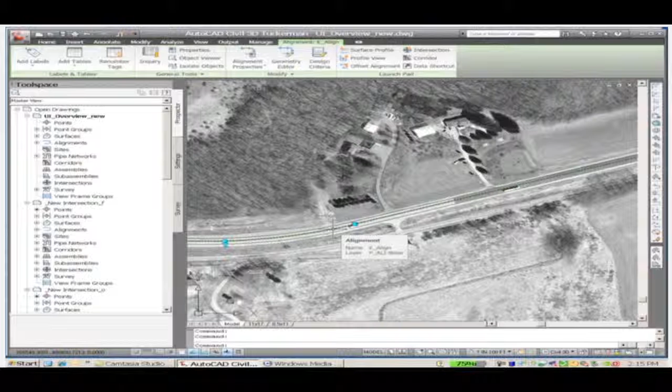In this drawing, you're going to see a roadway centerline or an alignment in plan view. So not only does the ribbon organize commands into related groups, but it updates based on context. For example, I can select the alignment from my drawing, and the ribbon automatically updates with a set of commands specific to alignments. This context-sensitive menu layout helps reduce the time spent searching for commands in pull-down menus and helps users become productive more quickly.

Customers that work with multiple Autodesk software products will benefit from a consistent look and feel across many of the products in the portfolio, so moving between applications won't be like learning a new language. The time savings gained from these interface changes may seem trivial at first, but if you multiply them across every operation performed by a user over the course of a day or week, the potential for productivity gains becomes clear.

Now let's explore some of the innovations in AutoCAD Civil 3D 2010 for transportation engineering projects.

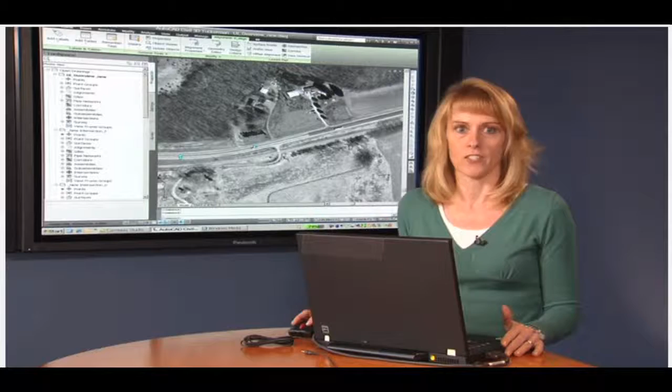Typically, when people think about transportation projects, they envision large new construction type projects—the type involving additional miles of state highways, interstates, tollways. While these projects do make the headlines, they're not representative of what transportation engineers typically see in practice.

The most common type of project is a roadway rehabilitation, which according to the U.S. DOT accounts for over 50% of the money spent on transportation infrastructure projects.

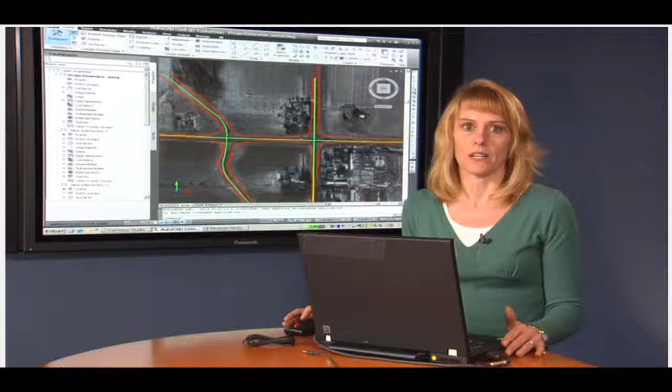What I'm going to show you today is a rehabilitation project that involves the reconfiguration of the two intersections shown here. This example has two parts. First, the distance between the two intersections does not meet minimum standards, so one of them will be replaced with an overpass bridge to allow traffic to flow under the highway. The second part of the project involves upgrading and reconfiguring the other intersection to meet current standards.

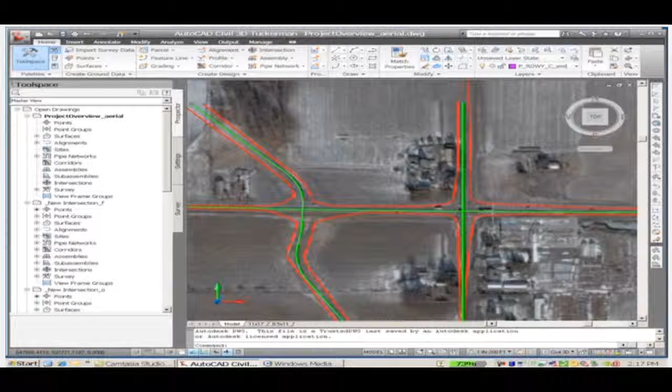We'll start by looking at the intersection upgrade. To design the at-grade intersection, we will use the powerful new intersection design features in Civil 3D 2010. These new tools help streamline how engineers work and make intersection modeling more flexible and configurable.

They will help engineers quickly iterate through different intersection options and help streamline a complicated workflow that sometimes took days to accomplish into only minutes.

One U.S. State Department of Transportation we are currently working with shared with me their workflow for designing a typical intersection. The workflow is 38 pages long and includes 33 steps. I mean, 33 steps, that's a lot of steps.

Much of the time in their workflow is spent manually laying out the geometry of the intersection and trying to accurately model each individual region in 3D.

Using the new intersection design features in Civil 3D 2010, that workflow can be reduced to only 4 steps. Geometry layout is wizard-driven and automates the generation of the intersection model. Needless to say, that DOT is anxious to get their hands on this new feature.

So let's have a look. Intersection design in Civil 3D is initiated by simply selecting the intersection point of the two roadways and specifying which is the main road.

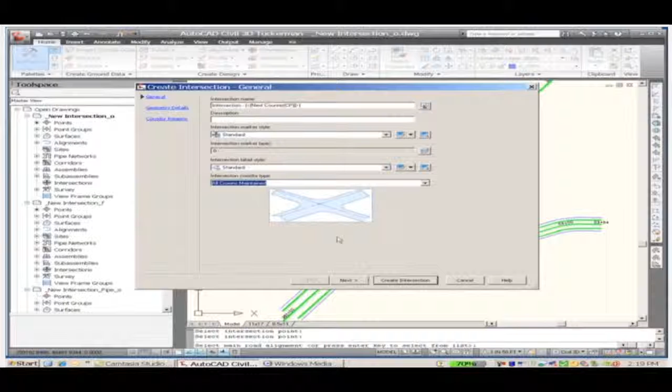Step 2 is where all the geometry of the intersection is defined, including the curves that connect the roadways in all 4 quadrants. The process is made easier by visual cues in the drawing that guide your way as you make inputs.

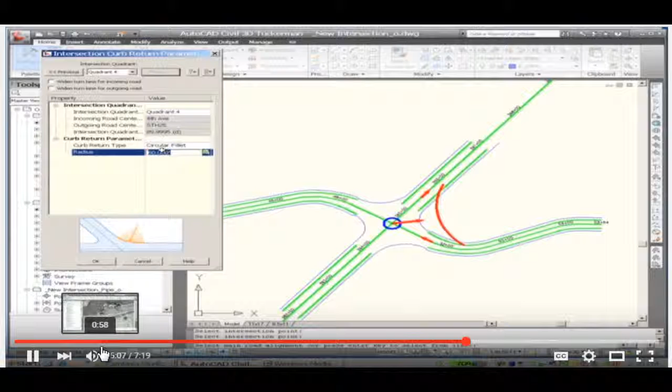The third step involves selecting assemblies, or simply put, the building blocks which will be used to define the 3D model of the intersection. Step 4, press the Create Intersection button. It is that simple.

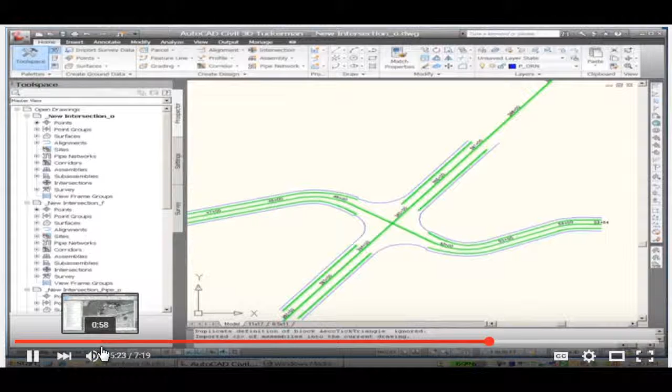I know when I worked for the Wisconsin DOT, everyone wanted a Design the Road button. This new feature in Civil 3D 2010 is the closest I've seen any software come to that.

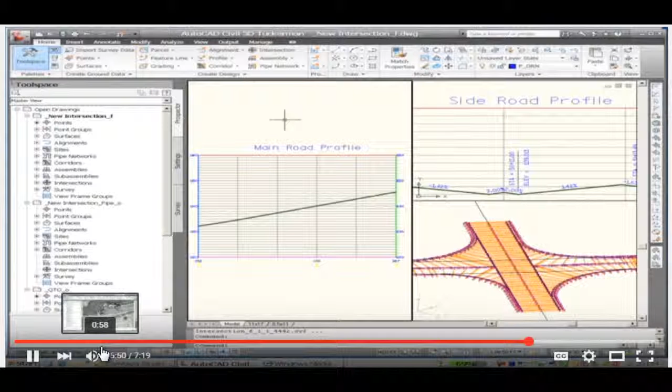The big benefit here is that the information in the intersection model is interrelated. For example, the side road profile and the main line profile are dynamically linked together. So if I make a change in the main line profile, that change is immediately reflected in the side road profile and corridor, and they update automatically as shown here. Without this capability, you would have to make all these adjustments manually, which is incredibly time-consuming and error-prone.

Beyond accelerating the design process, this new feature will help provide our customers with the ability to more quickly iterate through different intersection alternatives and layout conditions. This allows the engineer to more easily optimize the design for factors such as drainage and rideability.

In the past, the process of creating the intersection model would have taken hours, maybe even days to complete. Orangewood, a Dutch company participating in our Civil 3D 2010 Gold Beta program, told me that until now they rarely created detailed 3D intersection models because it was just too time-consuming. The CAD manager called the intersection design tool an astonishing piece of programming and said that instead of hours, he modeled his intersections in minutes.

Think about what this means in terms of cost savings. As I mentioned, intersection design is an iterative process, so with the help of Civil 3D 2010, the hours saved are multiplied by the number of iterations it takes to reach a final design. It's pretty powerful stuff.

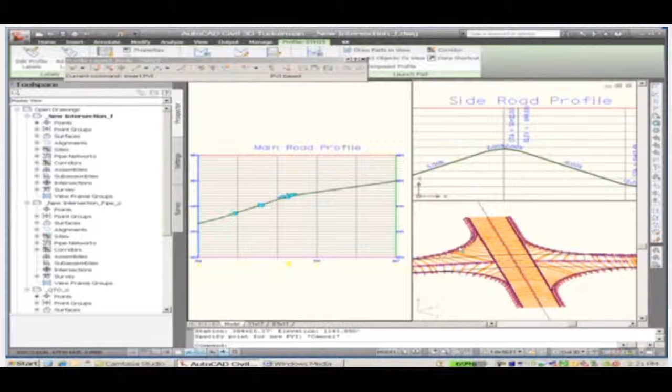Let's take a look at Revit Structure 2010 and the new Bridge Modeling Extension, which is a subscription benefit for Revit Structure subscription customers. The bridge engineers we talk to are looking for ways to collaborate in a more efficient and effective way with their civil engineering counterparts.

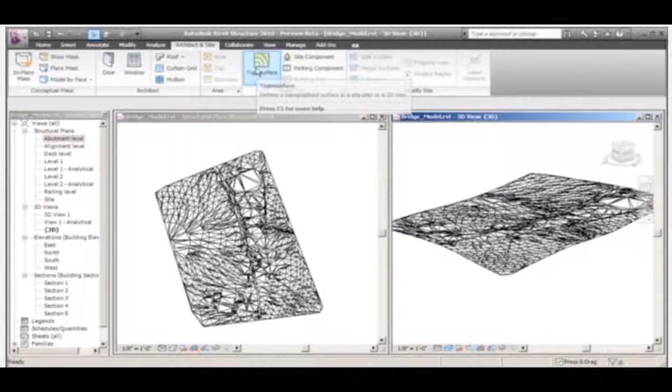One of the key features in the new Bridge Modeling Extension allows the bridge engineer to use road centerline and site condition information created by the civil engineer in Civil 3D. Surfaces designed by the civil engineer in Civil 3D are imported directly into Revit Structure, and this data can be used to quickly generate an accurate topographic surface for bridge modeling. This workflow drastically improves upon the 2D workflow that currently exists between civil engineers and bridge engineers.

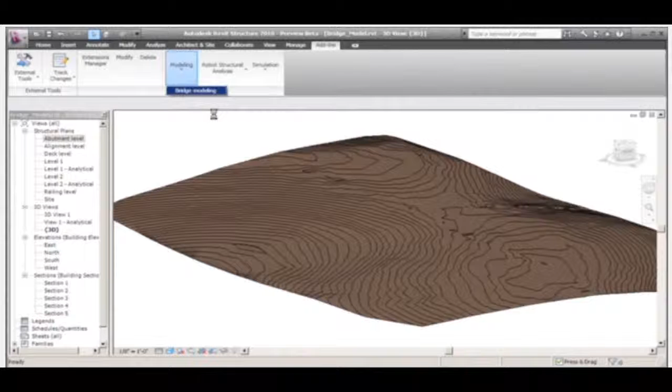In addition to the site information, the centerline of the road from Civil 3D can also be imported directly into the Bridge Modeling Extension using the industry standard format LandXML. The centerline compiles automatically once the file is imported, providing assurance that the bridge geometry we are creating matches what the civil engineer specified in Civil 3D.

The bridge engineer can now focus on defining critical layout information such as specifying the number of spans based on the overall length of the bridge, defining the deck properties, and defining the abutment type and location and the pier type and location. Since the road data was previously imported defining the locations of the abutments and piers along the road, this is a simple task.

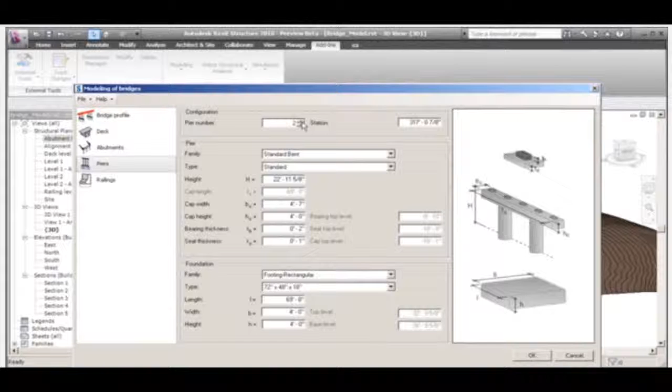With all the information from the civil engineer and the parameters defined by the bridge engineer, the bridge can be modeled instantly and we see the various views automatically updated. Now that we have our bridge modeled and the site created, we can adjust the parameters of the various bridge components to match the site conditions. A key aspect to note is that no two bridges are the same.

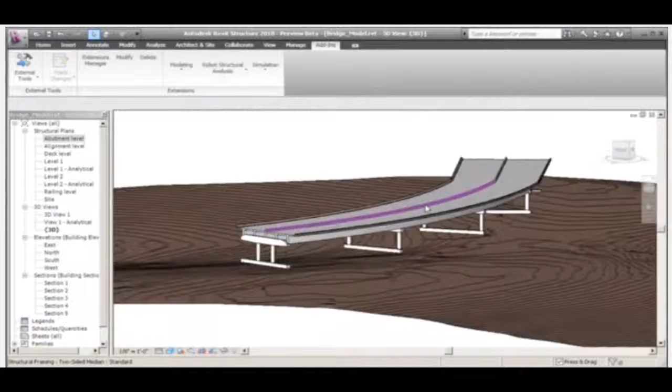Since all of the information for the bridge project is stored in one file, any changes made to the model are automatically propagated throughout the model, and all views such as plans, sections, details, and schedules. Using Revit Structure and collaborating with civil engineers using Civil 3D, bridge engineers are equipped with a BIM solution that helps improve coordination, visualization, and overall understanding of their bridge projects.

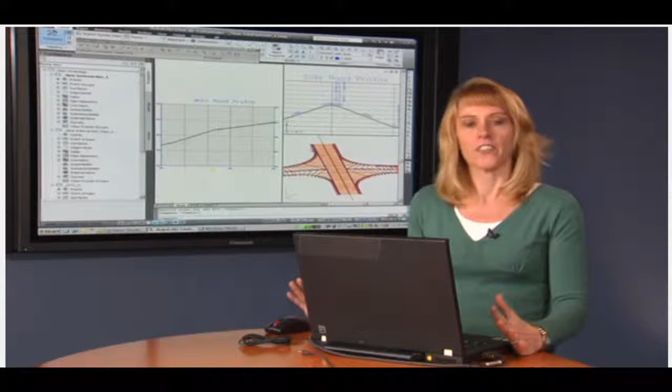Okay, so now that the intersection and overpass have been modeled, let's look at them in the context of the overall project area. As Adam mentioned earlier, one benefit of implementing a BIM process is the ability to leverage the model for visualization. This is particularly important in the conceptual design phase of the project.

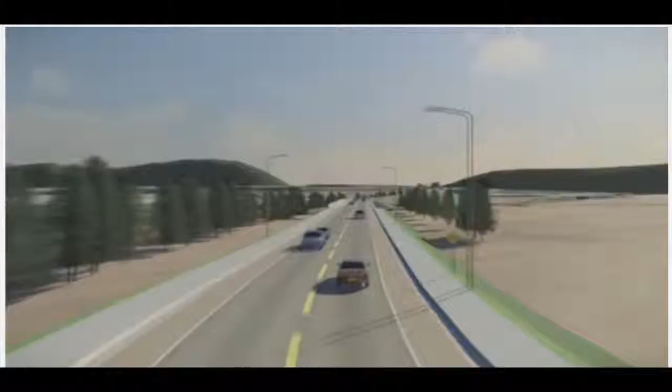Using Autodesk 3ds Max Design 2010 software and Dynamite VSP, a product from our partner 3AM Solutions, we can develop a project visualization showing the new overpass and how the highway traffic flows freely beyond it.

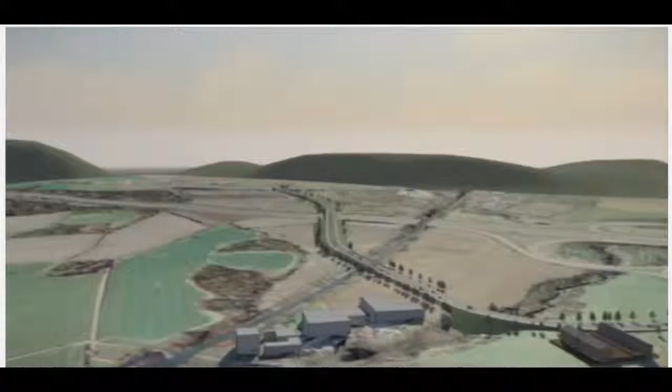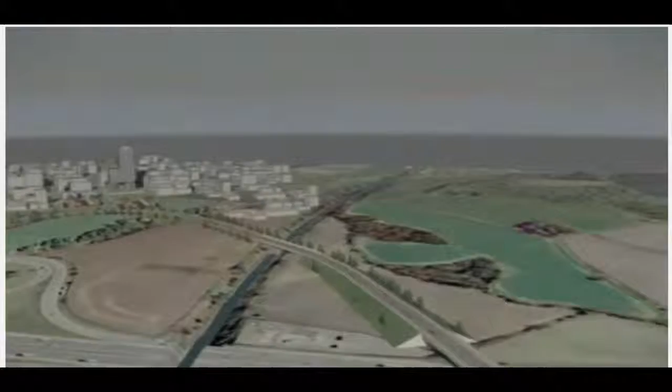Being able to accurately convey design intent will help reduce obstacles and objections and streamline project approval. Also, being able to visualize the project before it's built helps government agencies and community stakeholders better understand how the project will perform. Next up is the drainage network for our reconfigured intersection.

Stormwater drainage analysis is a key component of the overall roadway design process and is particularly important for maintaining road safety and minimizing erosion and water quality problems. Stormwater analysis has traditionally been disconnected from the overall road design process, making it difficult for the engineer to understand the impact of design changes on drainage without rerunning the analysis each time. This is time-consuming and error-prone.

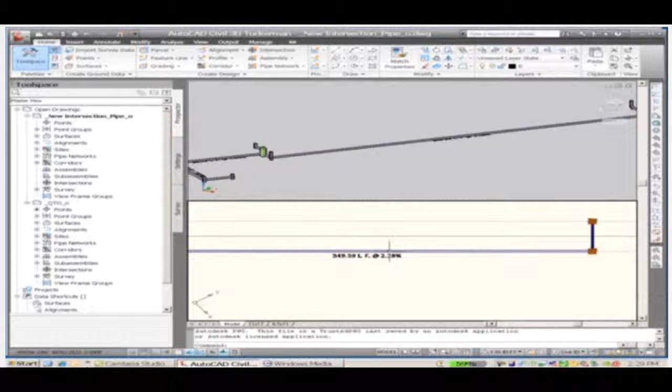High on the wish list of our transportation engineering customers is the ability to integrate stormwater analysis with roadway design. With Civil 3D 2010, the wait is over. Drainage networks can now be laid out in Civil 3D and then analyzed with an included extension that fully leverages the model. This tight integration between stormwater system layout and analysis makes it much easier for the engineer to account for stormwater drainage during design.

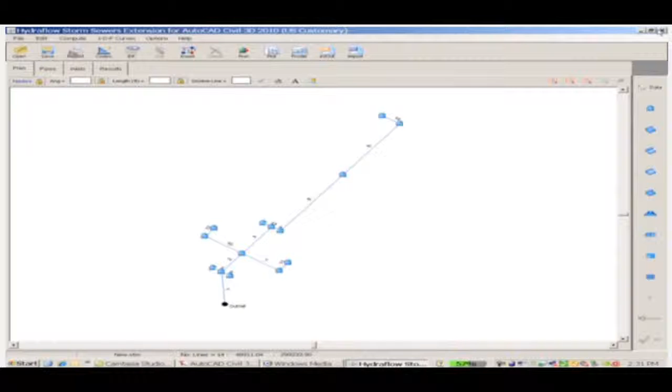So what I can do is once initial pipe layout is complete, the information on the proposed pipe can be sent out to be analyzed. When the analysis indicates a problem, changes are made to the updated network. And these can then be sent back to Civil 3D, or I can import them into my layout.

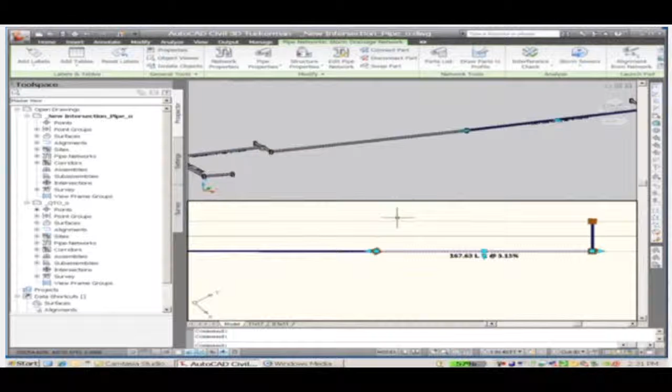So this more integrated approach to drainage network design and analysis will help our customers improve efficiency and quality, and checks one more thing off the 'I wish my software could do this' list.

Another critical part of the transportation engineering workflow, and one of the most tedious and time-consuming tasks during the production of a plan set, is the calculation of pay item quantities, also known as quantity takeoff. This is typically done manually, counting items paid for individually like lampposts, and performing measurements to get quantities of other items such as curb and gutter, which is paid for by the linear foot. When I worked for the Wisconsin DOT, we had teams of people focused on the task of computing quantities to prepare for bid letting. But with this time-consuming manual process comes a greater risk of errors and omissions.

The new quantity takeoff functionality in Civil 3D 2010 significantly streamlines this process by extracting quantities directly from the model. Our users will be able to assign pay items to objects in the model and have the software automatically count those objects, eliminating the need for manual counting and greatly reducing the chance of error.

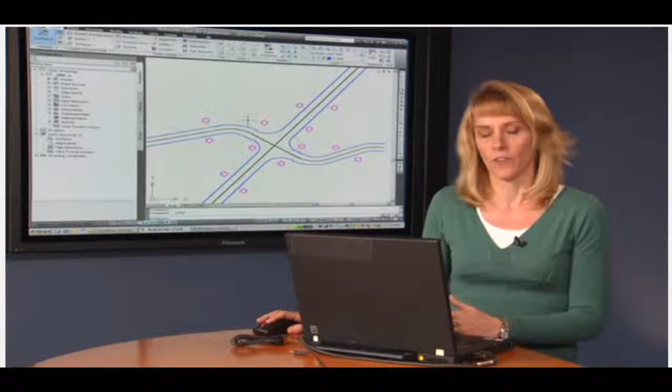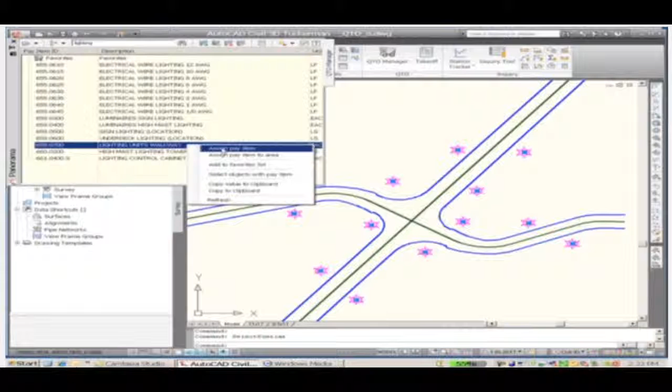So using the new quantity takeoff manager, pay item codes can be assigned to objects in the model. They can be assigned to objects individually. So to start, I'm going to assign a pay item to these lighting units that you see here, and I'm going to use the pay item lighting units walkway. Once I select the objects from my model, assigning pay items to them is a one-click process.

No more counting and entering values in a spreadsheet. Now, as a bonus, the Quantity Takeoff Manager in Civil 3D 2010 can also be used to check that pay items have been properly assigned. So I can just come in and check it out. It shows them to me, and I know that I got all of the pay items that I wanted.

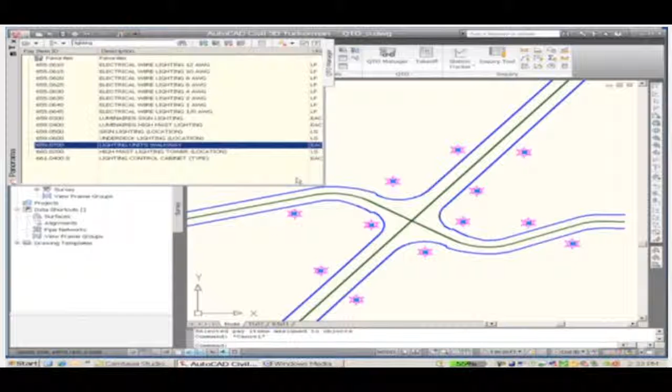This powerful new feature may seem trivial at first glance, but missed items in a cost estimate can result in expensive contract change orders in the field. When that cost comes out of your bonus at the end of the year, this no longer seems trivial.

Quantity Takeoff is also integrated with roadway corridor models. So inside a corridor model, I can assign pay items to things like flow line of your curb and gutter. So any feature line, I'm going to use something like curb and gutter, so I'll just look for it here. I'm going to use this type of curb and gutter, and all I have to do is say apply, and it goes through and assigns that pay item to that linear foot of curb and gutter.

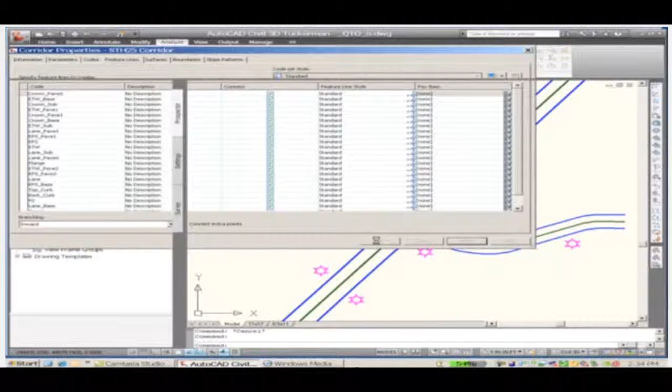The thing that our beta customers were most impressed by with this new feature is the fact that when changes are made to the corridor, the computed quantities update automatically. So the manual recalculation of quantities is virtually eliminated, and last-minute design changes don't result in hours of overtime to update quantities.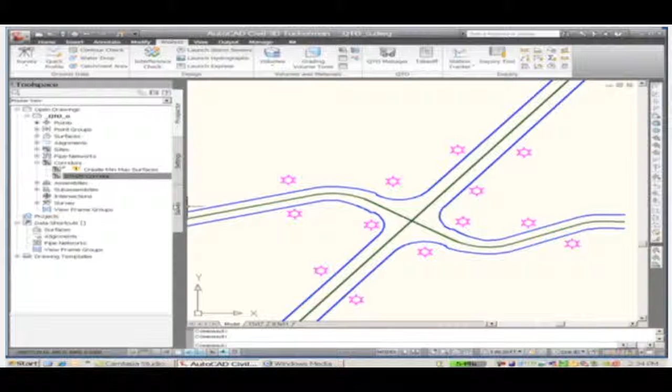Now, after pay items are assigned to objects in the model, quantity takeoffs can be computed, and different types of reports can be created, including style sheets that interface with the AASHTO transport software.

The new quantity takeoff functionality in Civil 3D 2010 helps to better integrate design and construction, enabling transportation engineering teams to better prepare for bid letting in an automated fashion. The result is a more streamlined transfer of information to cost estimating software mandated by many state agencies, and a decreased incidence of errors and omission.

Now, I'll take you back to Adam.

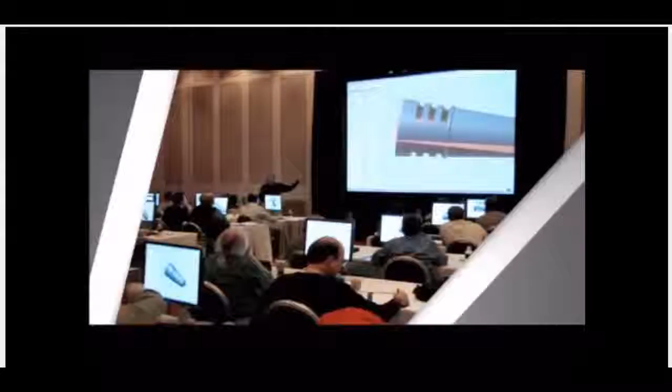We're going to talk about a really interesting field trip that Trimble and Autodesk sponsored on Monday of the event. I have with us Karen Weiss, and she's going to tell us all about it. Karen, what was this field trip about?

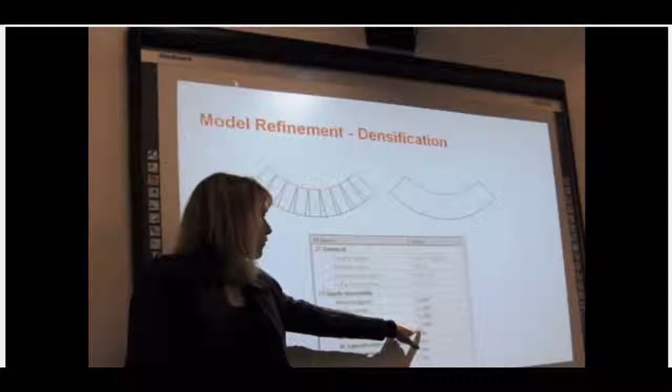Well, because we're focusing a lot on heavy construction and the model creation in Civil 3D and the whole 3D modeling aspect of everything, we've done some work with Trimble to create this importer for Trimble Business Center, a heavy construction edition. So the idea was really to show what happens with your model when you take it to construction and how far the technology has come.

Back when I started doing roadway design, we would create cross sections every 100 feet, and then that would get staked in the field. Well, now you cannot take that out to the field and put it into these machines. So the whole idea was to really show what's the best way to make that model in Civil 3D so that they can just take it directly into Trimble Business Center for use on the machinery.

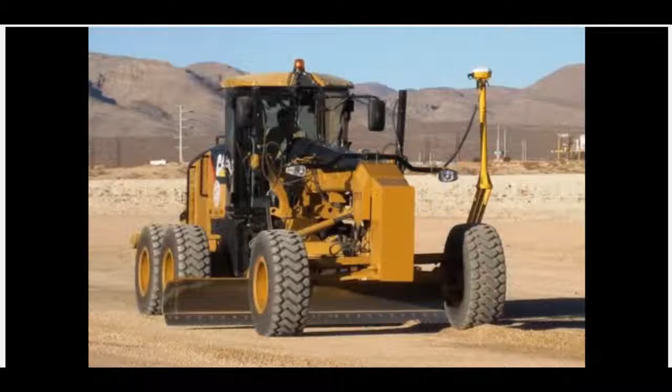So we looked at 3 different types of equipment. One was a motor grader. We also looked at just the total station using GPS and the rovers as well, so that everyone on the field trip got an idea of what the technology is, how the model from Civil 3D is used, and how important it is to actually create a model that is intelligent.

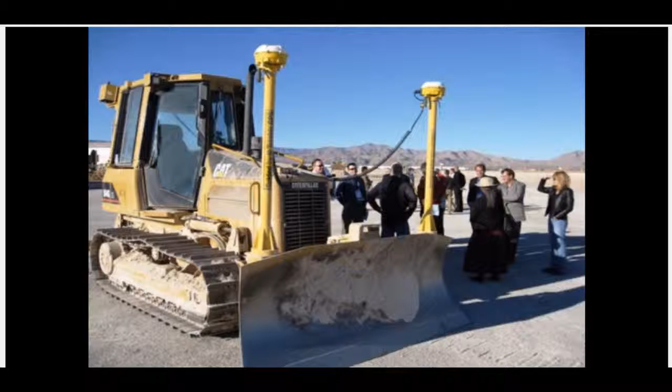So you literally went out with a group of folks to a facility where you were on the computers first, sort of set the stage, and then literally went out into the field where the GPS-guided equipment did its thing. So tell us a little bit more about that process.

So what initially happened was they went out to collect the existing ground data, which they gave to me. Then I used that to create a model in Civil 3D. So we did this ahead of time, so then I could give them the model. In the classroom, we actually talked about the model creation. I showed them exactly how I created the model, very quick and easy.

Passed that information to them, just gave them a stick. They loaded it into Trimble Business Center. Oh, I see, so they actually did it. Right, so then the Trimble folks did that. They created the file formats that they needed. And then, yes, we took it out into the field, and they showed the motor grader actually grading this small site right in front of your eyes.

You saw it go from the classroom to the field. Now, the initial input data was from laser scanning the site, is that correct? I'm not 100% sure how they got their data. It might have been from laser scanning, but it's a small site, so it was very easy to get the data.

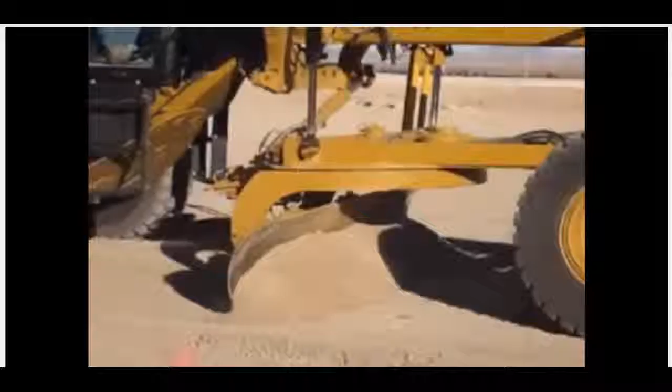But in general terms, this work we've been doing with Trimble and so forth does have implications for a scenario where you might be laser scanning an environment, taking this rich point cloud data. Amber Core, I know, has been working with Autodesk on making sure that data remains rich as it comes into Civil 3D, and then you can go through and using the Trimble software solution do everything you were talking about on the Monday field trip, correct?

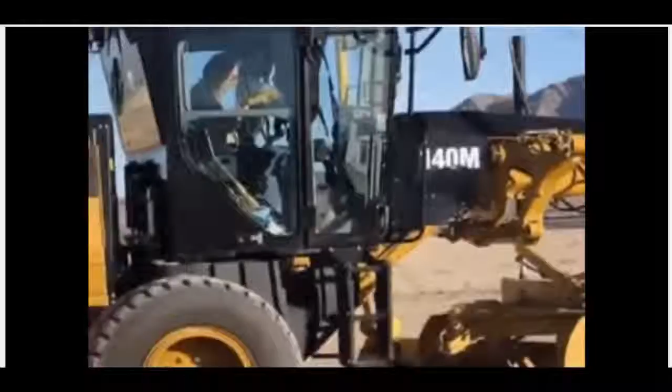Right, correct. It's a fairly seamless process. There's no loss of data. That's the biggest thing. You want to be able to take that information, don't do any manipulation, read it directly into something like Civil 3D so that we can create the model there, have them seamlessly pull that model information out that's still intelligent, so they're getting profiles, horizontal alignments, feature lines, everything they need to actually give the surface to the folks in the field.

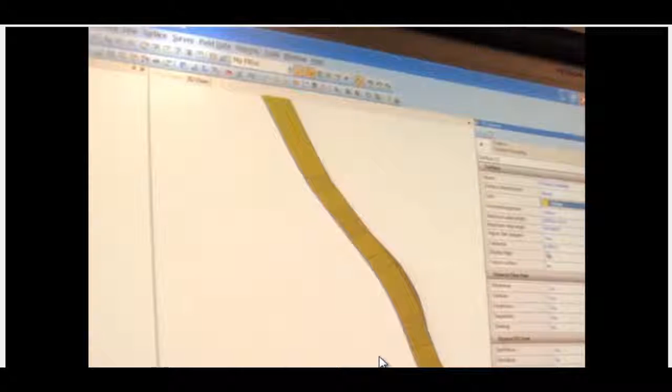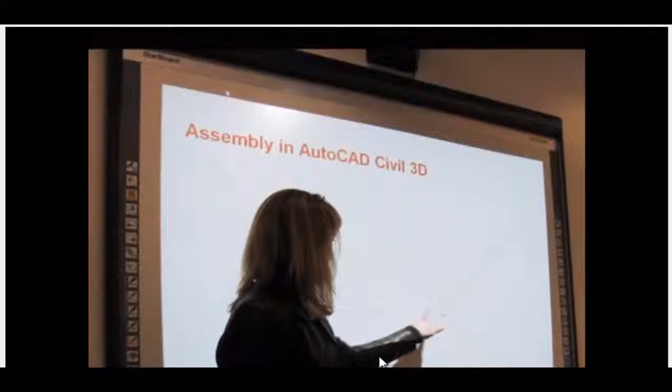What was the reaction of the participants? I think everyone was pretty excited. To actually see the blades moving, it's just something you don't experience every day. You hear about it, but until you see it, you really don't understand how powerful it is, how much money it saves. The whole idea of not having to send people out there to pound stakes to do the grading, how you can take an operator who's great, and he's even greater with this technology.

Well, it's changing the whole world of civil engineering and land prep. It's just remarkable. Well, thank you so much for your time. Yeah, thank you, Ralph.